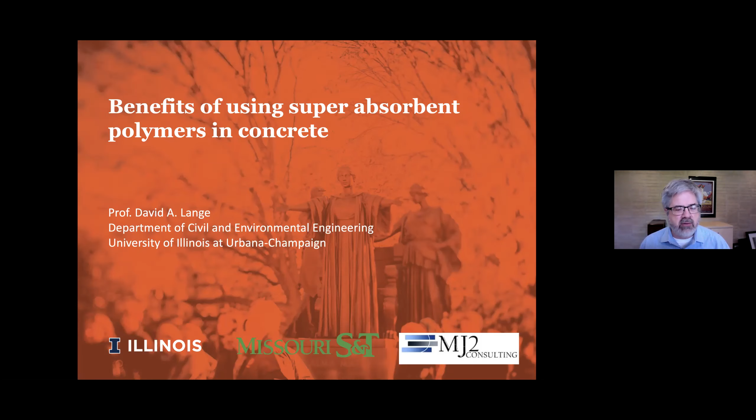As we get started, I want to make acknowledgements. First, introduce you all to the team on this research project: Kamal Khayat, my very good friend and colleague from Missouri University of Science and Technology, and Matt D'Ambrosia, who is also one of the PIs. Kamal, Matt, and I are the PIs of this project. Matt is working with his MJ2 consulting company.

And then I list some of the students and postdocs: Nima Farzania, Yunkun Gu, Kartik Padajay, Chuan Yu Shen, Rufi Zhou. Those are the students who have been primarily involved in the experimental work.

It would be a big mistake to overlook our big industrial supporters. I really appreciate the outreach of support from suppliers of SAP that have been involved: Martin Matsushek, Scott Erickson, Mike Hensley, Steve Schaaf. And then a special emphasis on our contributions from Ozinga.

Ozinga has helped us with field trials, last year and also coming up. Ryan Ciodella has been my most recent strong contact. And in doing so, you know who I left off? Theron. I didn't have your name on here, but you've been the contact that has drawn us close to Ozinga and helped us solve problems there. So Theron Tobolsky is one of our big supporters as well.

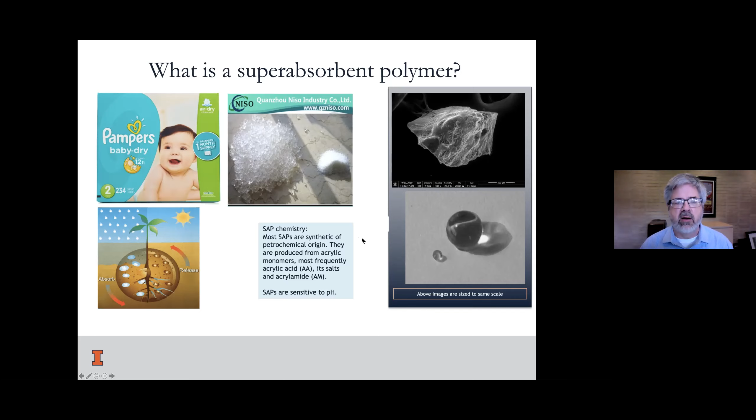On the right-hand side, you see two different kinds of particles. If the super absorbent polymer is basically created from a bulk material and crushed, we see particles that are very angular like this, and in fact this is how most of our products are - they have this crushed form - but you could also get them in a beaded form. We don't tend to see it that way in our product, in the materials for our work.

The idea with SAP is that we add this material as a powder into the concrete truck and use its ability to hold on to water and release it later. There's a competition for water, and the SAP particles win that competition when there's an abundance of free water, so they swell up in those first minutes of contact with the concrete.

As the concrete mixes and goes through a setting process, these little beads of swollen SAP stay in the microstructure until they lose the competition for water. That is, the hydration of the cement kicks in and starts fighting for water, pulling it away from the SAP when the time comes.

Hopefully we've got the structure of the concrete all set and established, and that water is seen as an extra reservoir to the paste as it goes through hydration. This helps us overcome a phenomenon we call internal drying, or autogenous shrinkage, which we'll talk about in a minute.

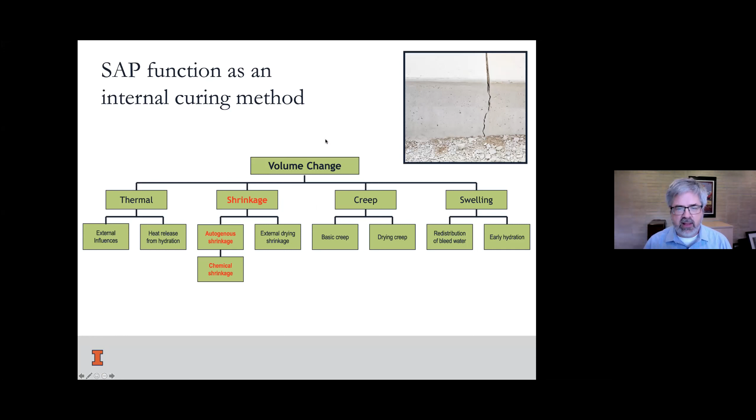When we batch concrete, we distribute the mass fraction of the main components: water, coarse aggregate, fine aggregate, and cement. This is very familiar to us—we encounter it every time we batch up concrete, and it's normally done by weights.

But we should take a moment to appreciate that the specific gravity, the density of these components, is not the same, so the volumes of these components will differ. Our coarse and fine aggregate have a certain specific gravity, water has a lower specific gravity, and cement has a high specific gravity, so the relative volume of the cement is down.

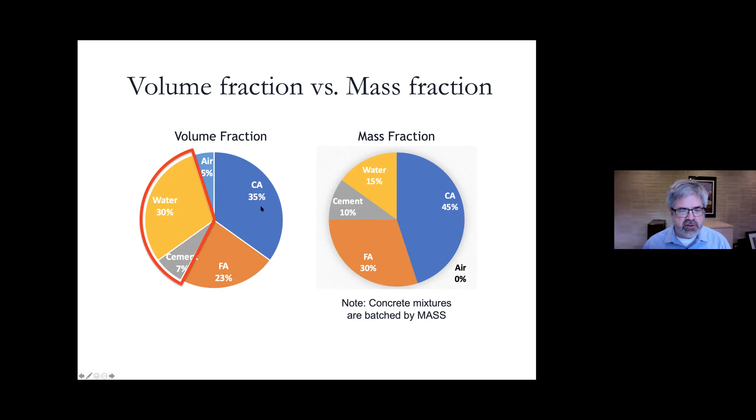This part, the water and cement, is what chemically reacts during hydration, and it's this part that creates hydration products that undergo autogenous shrinkage. We're not going to worry about any volume change from the aggregate, but we do worry about it on the cement paste side.

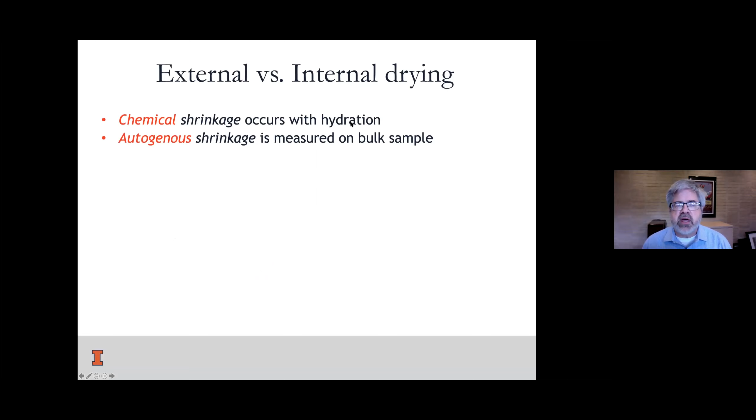This goes through a 6 to 7% reduction in volume of the hydration products compared to the original water-cement volumes. That reduction is called chemical shrinkage, and it's just part of the reality of our system.

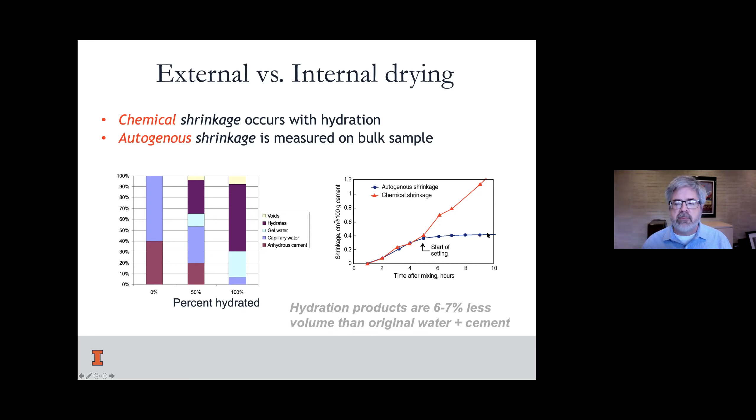They're basically the same thing when the concrete is fresh and fluid—if there's any reduction in volume, the material just collapses on itself, so here they're equal. But at the start of set, there's a departure. With set, the autogenous shrinkage starts constraining and creating stress in the microstructure, because the free collapse of the material, since it's no longer a fresh flowing material, can no longer occur. So we get this deviation between chemical shrinkage and autogenous shrinkage.

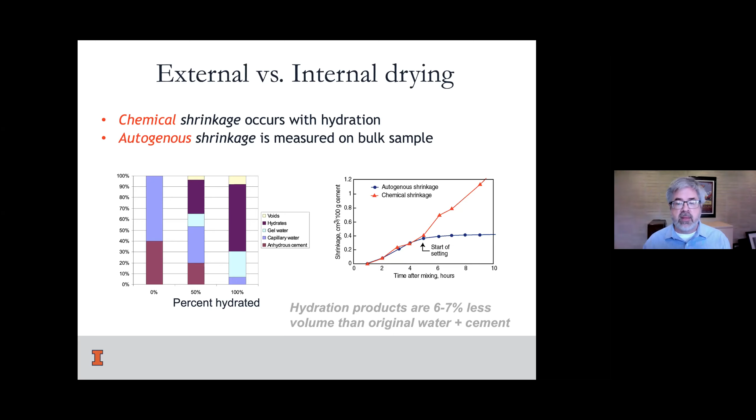When that deviation happens, that's the moment stress begins—this is when autogenous shrinkage starts creating an internal state of stress that causes cracking. That's why we need to address this internal problem.

And finally, I run out of free water and something has to give. What gives? Here come the little water vapor bubbles, we'll call them bubbles. They're not necessarily bubbles like a regular entrained air bubble. They are little zones of water vapor where the liquid water is no longer there, but there's a pocket of water vapor, a pocket that has negative pressure.

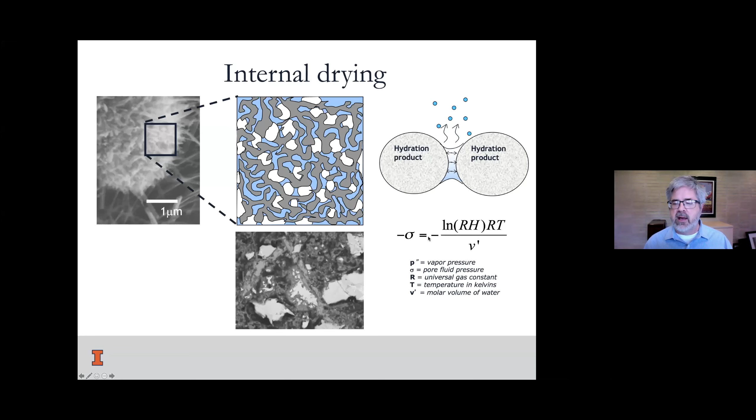So we want to try to stop that water loss if we can. How are we going to do it? Well, the basic idea is that we go through wet curing or conventional curing to keep water from leaving the external surface. But we also have this problem that would be true even if the material was perfectly sealed. This problem is not due to external drying shrinkage. And so we have this idea of internal drying.

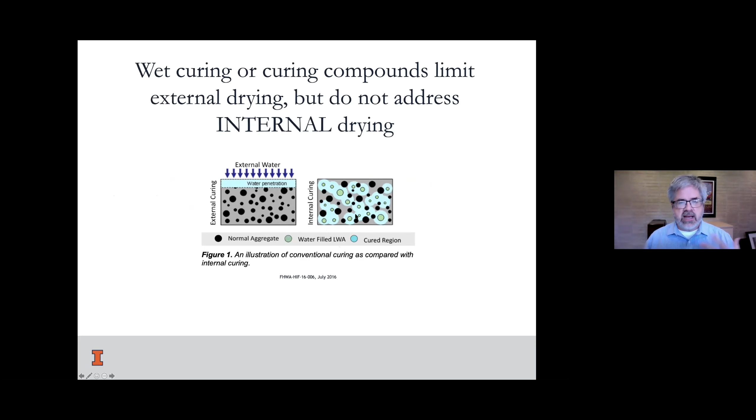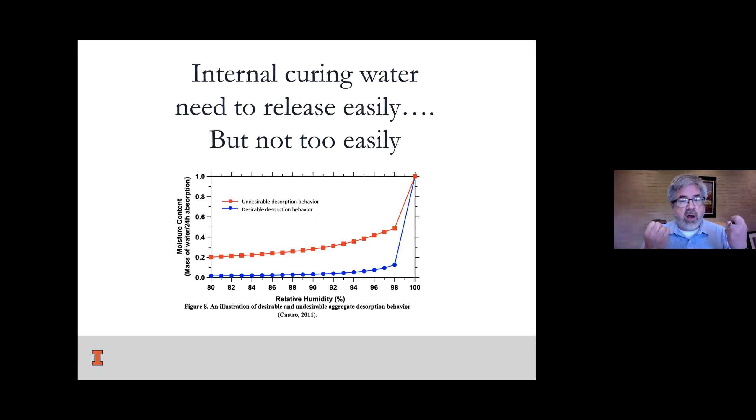With internal curing, we need to find ways to put that water in a pocket and then release the water easily, but not too easily. If it's too easy, then we haven't accomplished anything—the water is just free and moving around like it normally would. But we want to have some kind of retention ability, so the water is held until a little bit later in the process. You can see here where a couple percent drop of relative humidity creates a pull, a competition for the water that pulls it back away from the superabsorbent polymer.

Another common way to do internal curing is with lightweight aggregate. We've been comparing lightweight aggregate and superabsorbent polymers—the basic idea is the same. In the case of lightweight aggregate, we have a porous stone, maybe 70% pores, and the water sits in this saturated lightweight aggregate. Then when it is needed, it comes out fairly readily. It loses that battle pretty readily—the lightweight aggregate tends not to hold onto it very well, and it pulls away into the microstructure. It's been relatively established as an internal curing technique.

I think working with these lightweight aggregates is not something everybody likes—trying to source them and keep a stockpile. They're maybe a little bit hard to find in the marketplace. So there are reasons to think that lightweight aggregate is not necessarily a great solution for everybody.

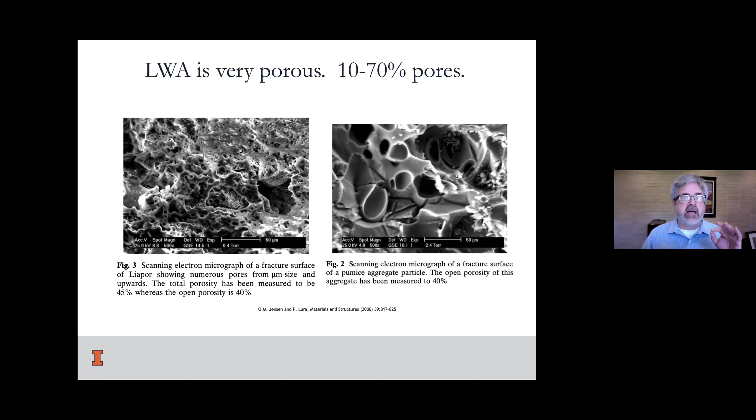So for superabsorbent polymers, here's a little description of how we measure the capacity of these things. We have an absorption behavior and a desorption behavior. If you wanted to test this, you might put a sample of the superabsorbent polymer in a tea bag, literally a tea bag like you make tea out of, with paper around it to keep it isolated. Then as water is absorbed, the weight of the bag of saturated particles becomes heavy. We measure that, and later we can see it desorb as there's some kind of demand for that water outside.

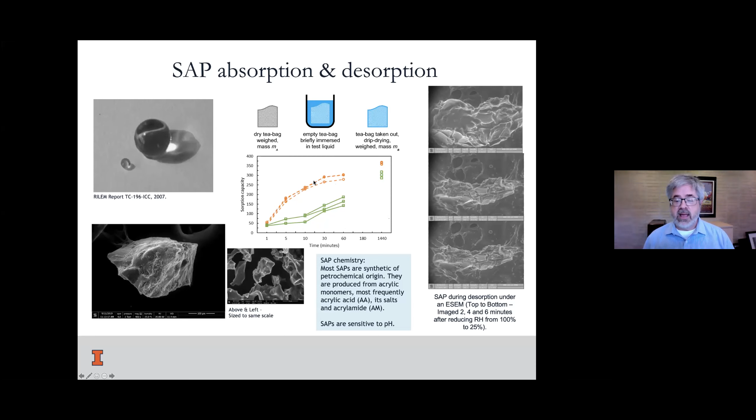So in this case, we just saw a couple different samples of brands of SAP, and the simple point is not all SAPs are the same. Some absorb more, some absorb it more quickly. We would not want to make the mistake of saying they're all the same.

Here's another point to keep in mind: distilled water versus pore solution. Pore solution is not clear, plain distilled water—we know it has a high pH.

That's why in concrete work we have a lot of safety measures to keep it from long contact with hands. You've probably experienced this yourself, where you have concrete on your hands and it feels like you really need to put some lotion on at the end of that.

So in the case of distilled water, just look at these numbers: peak absorption in grams per gram. These are the numbers when you have plain distilled water with these 5 different SAPs, 100 times gram per gram of the SAP. Wow, that's a lot of absorption, right?

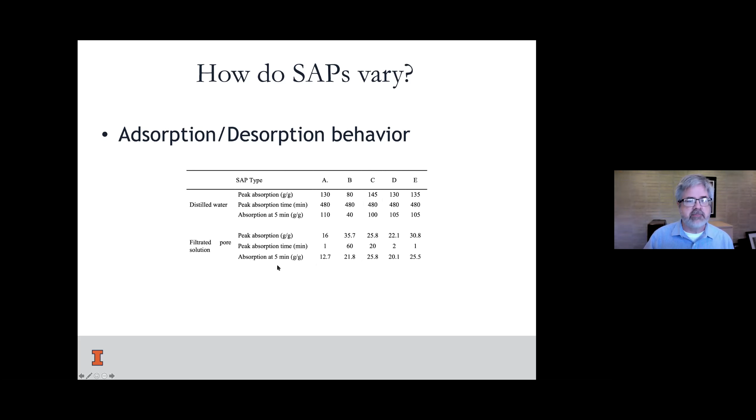A big question for new users is how much lightweight aggregate or SAP should be added to concrete to do the job. So the first thing we need to recognize is, what is our objective?

We need to add internal water enough to offset chemical shrinkage. That's what we're going to try to do. We talked about what that chemical shrinkage is - we know it's 6 or 7% by volume of the cement. And that comes, in this case, I'm summarizing it as 7 pounds of water per 100 pounds of cement as a rule of thumb.

In the case of lightweight aggregate, you want to make sure that you're using saturated lightweight aggregate. If it's dry, it's not helping you too much - it won't work the problem as effectively as bringing it in as a saturated particle.

In the case of SAP, however, we really don't want to bring that water in with the SAP already saturated - this would be a globby mess, to be quite frank. So what we want to do is add it as a powder right when we're working with a mixing operation.

So we can add it in - we've added it into the back of the truck. It actually goes in pretty well. Our testing shows it's quite homogeneously dispersed.

So you always wondered about that - would this work to be dispersed in a truck if we did it that way right at the time of delivery of the concrete to the site? Our sense is that that's probably the best way to go, to add it as an admixture into the truck right before using.

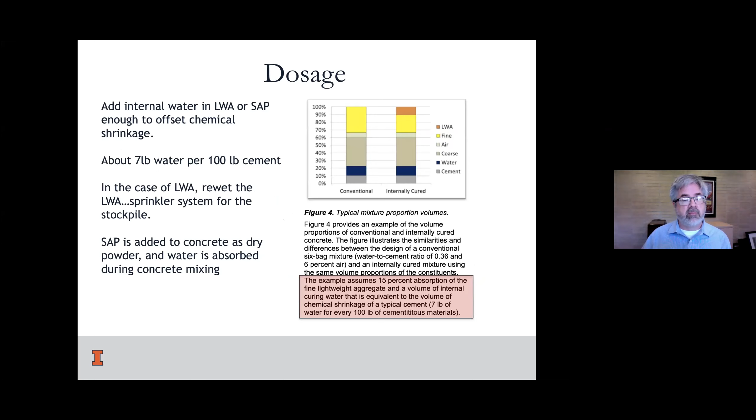So if we're doing these dosage calculations, this would be similar for SAP or lightweight aggregate. We want to know the absorption and desorption characteristics of our material, and basically size the dose of the lightweight aggregate or superabsorbent polymer to give us delivery of that water.

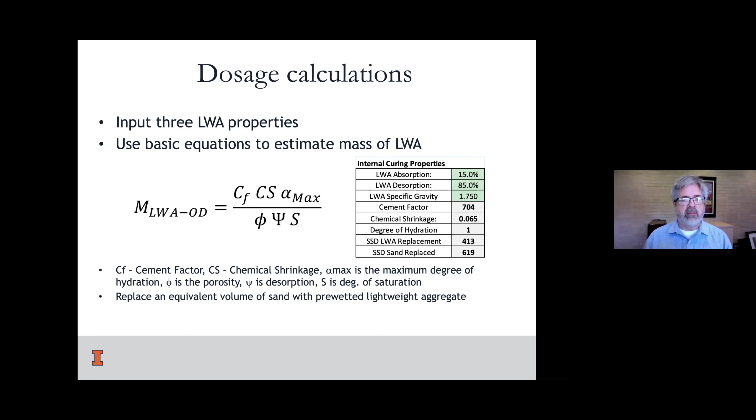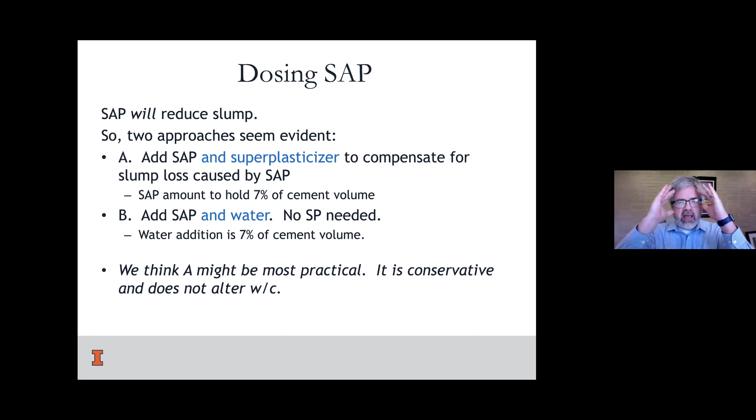Dosing SAP - we know that SAP will reduce the slump. So we somewhat have two choices to make here. We could add the SAP, suffer the slump loss, but then add in a superplasticizer to compensate. That would allow us to use the original mix design and count on the superplasticizer to offset that workability factor.

Secondly, option B, we could add some extra water. Therefore, we would want to have a mix design that understood that. Because with this mix design, we're going to change the water-cement ratio if we do that, we would maybe avoid the use of the superplasticizer, et cetera.

You know what? We early on all came to think that let's just do A. A is sort of the more reasonable approach - we don't want to perturb the original mix design if we can help it. We'd like our strengths to come out as predicted by the mix design originally. We also would like to think of an easy approach to do this in practice, since we have a lot of history with certain mix designs - we've used these mix designs.

We know they deliver certain kind of properties, everything. It would be nice not to change all that. It would be nice to have the strengths come out the same, and the durability would be maintained, and so on and so forth. And that's why A seems to be what we're leaning toward in terms of this.

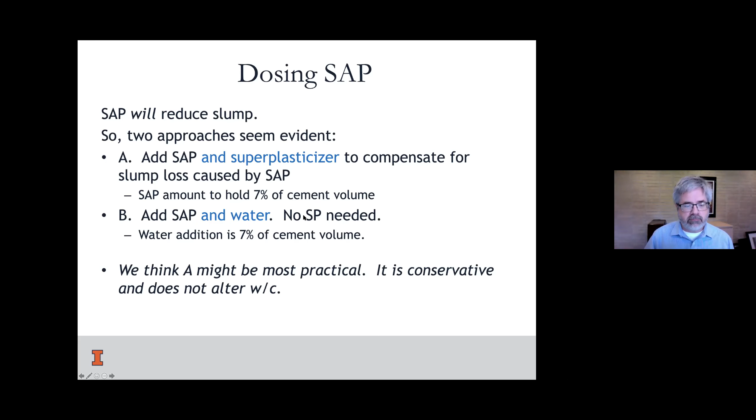If we are able to add it, such as we saw with method A, our water cement ratio is not going to be changed. We would hope that perhaps the strengths are going to be the same. Good news, in fact, all the testing seems to say that's true.

We basically have sets of different kinds of materials that we've tested, and the strengths are either the same or even maybe a little bit improved because of this more effective internal curing and the distribution. I guess I would say there's some argument about having a more homogeneous microstructure.

But at any rate, there's not a reason to think that somehow the use of this SAP is going to create a spiral of problems with strength and so forth. We think that it'll be conservative, and that your experience with strength should be just fine.

But if you want to target a strength, I think we go back to cement mix design basics. We design for the strength based on a water content in the mix, the water cement ratio, and so on.

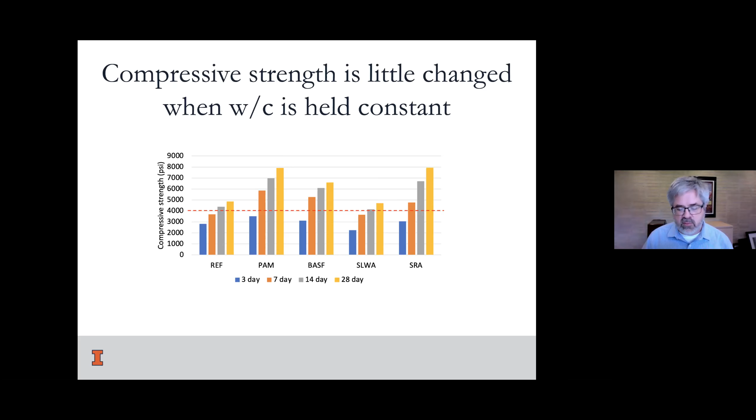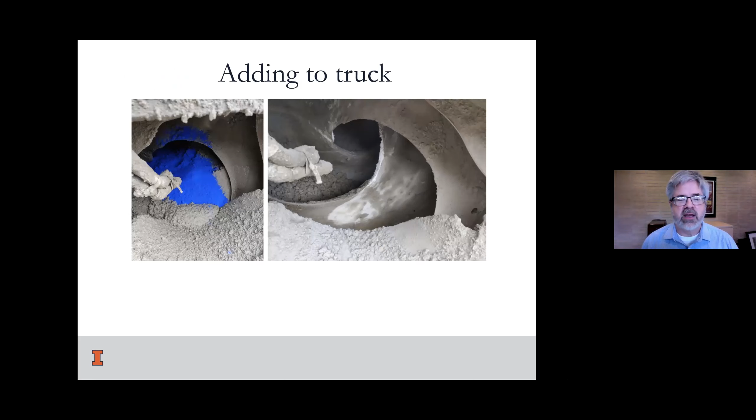And so we've added it in there into the back of a truck, and in fact, it just blended. One thing we notice is that it sometimes might get a little bit agglomerated on the surface of the blades, but I think there may be even some ways to be clever about entering it so that it doesn't even have that much problem with the blades.

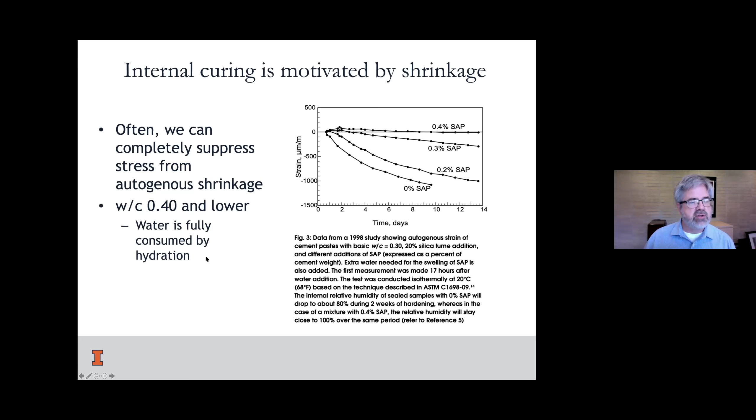But as we use SAP, we can offset that because the system works to avoid this idea of desiccating the microstructure.

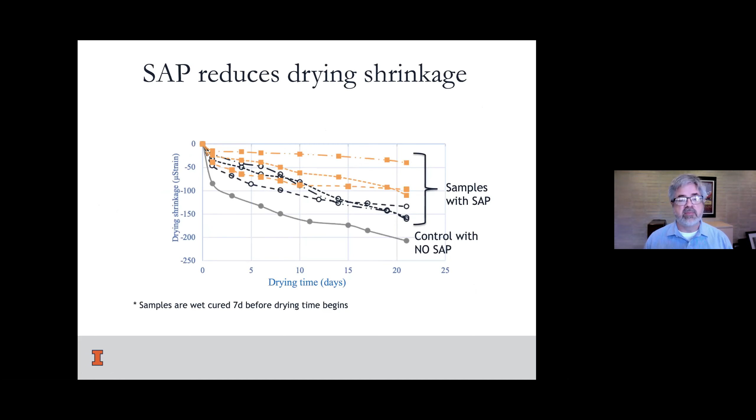We also have done some work with the restrained ring test. Actually, a lot of this work is still underway. This is a somewhat recent test where we cast concrete around a steel ring and then we put strain gauges on the inside of the steel. If you've not seen this test before,

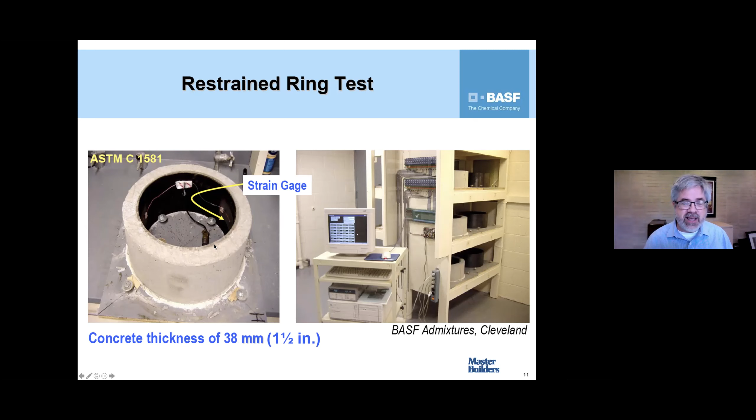the first instinct is to be skeptical. You mean the concrete shrinking around the ring is going to be actually measurable on a big, thick piece of steel like that? The answer is yes. These strain gauges are real sensitive and they can pick up that squeezing action that the drying concrete places on the steel. It's amazing.

And what that does then is it gives us a chance to measure that stress, and we can track that stress with time. In this case, we get to about 6 days, and we keep building stress more and more and more, and then boom, something happens. What happens is called a crack. The sample, the ring of concrete breaks, all that stress is relieved, and we see it in the data.

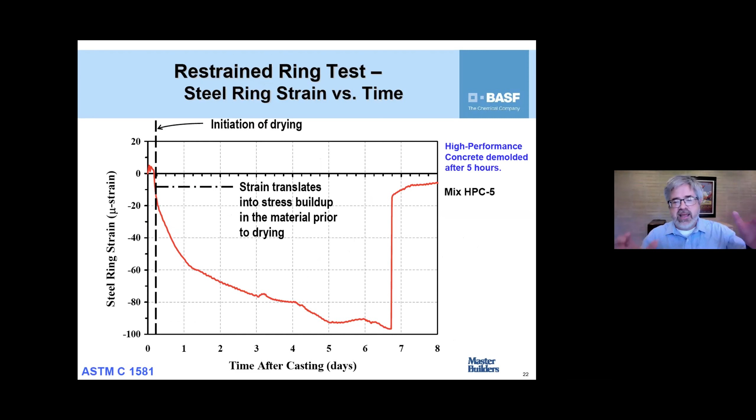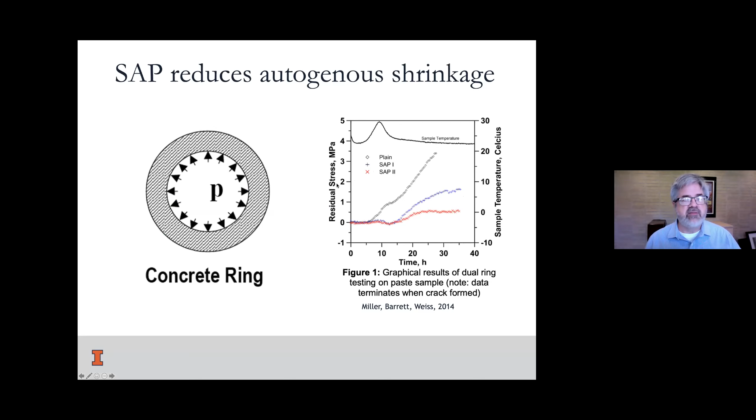So here's some examples with SAP. We have a plain sample and then 2 different SAPs. Here's the stress is building, building, building, and where the data ends is where it cracks. Okay, so it cracks here at about 24 hours. And these SAPs did crack too, but more at 35 hours and much lower stresses when that took place. So those are nice, vivid examples that SAP is making a difference.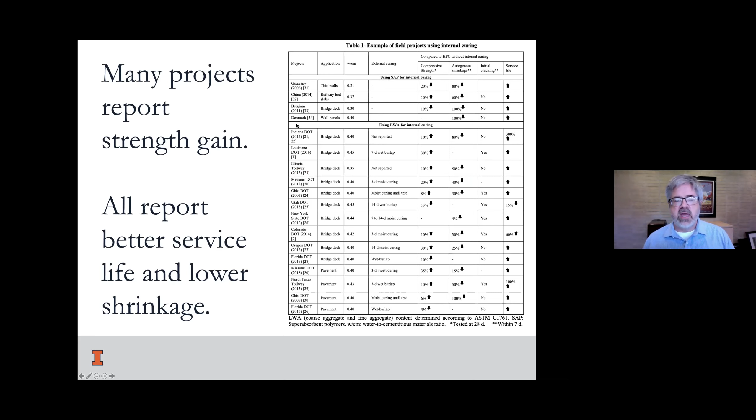SAP improves freeze thaw performance. Some people speculate, aren't those little particles of SAP leaving voids inside the microstructure? Yes, they are. Well, the concept of air entrainment is to have a little void, a pressure relief valve and so forth.

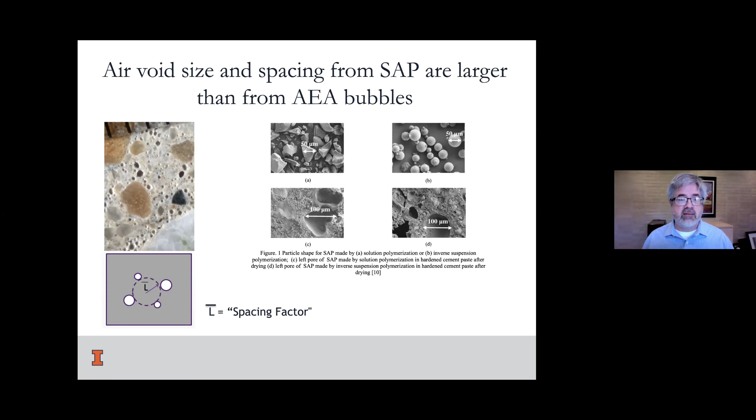Does that maybe remove the need for air entraining admixture? No, that's the finding. The basic thing is the air void size from air entraining admixture versus SAP is much larger with SAP. These are just illustrative pictures, and I don't have data to give exact sizes, but take it as a truism that the voids from SAP are big, with big spacing, and therefore have limited ability to reduce freeze thaw stresses and degradation.

So the data here shows our samples: some with no air entraining admixture, and the same materials with air entraining admixture. The SAPs outperformed the reference with air entraining admixtures. All of them were okay, all stayed above the threshold in the 666 tests. But when you don't have air entrainment, they all failed at some point before 300 cycles.

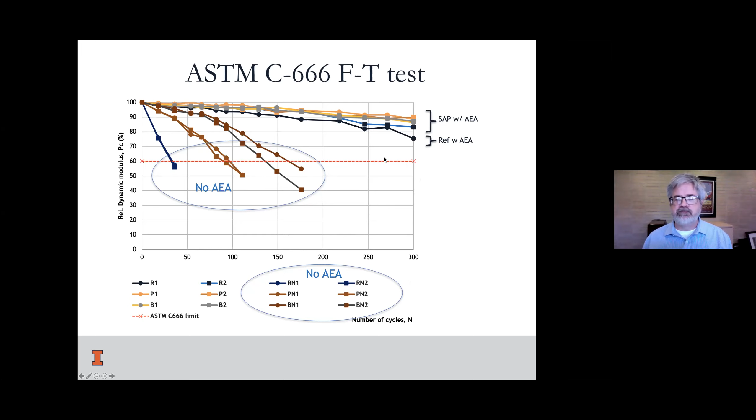So the SAP is better than not having SAP, as you see here, but it's not good enough to say, oh, I'm just going to leave air entraining admixture out and assume the SAP is going to work for me for freeze thaw. No, don't do that. But anyway, it's working in your favor, so that's a good thing.

Other ways to control shrinkage. Before we leave this topic, we want to give a nod to other things that are done to control shrinkage.

Shrinkage reducing admixtures, these are just broad observations. I think SRA admixtures are the real deal. They're finding pretty good traction in the marketplace, and people are finding them to be very useful. They're a fairly new generation of admixtures. That's pretty exciting.

Second, we could avoid all this self-desiccation, this chemical shrinkage problem, if we weren't so low. Part of our problem is self-imposed. We're always driving concrete strengths to be so high, with very low water cement ratios. So it's basically a problem we beg for. We're creating concrete known to have this demand for water that we're not providing in the mix design. We shortchange the mix with regard to water, and hence this whole subject.

So you could look for opportunities not to be as aggressive. This is one of my themes, and another theme I hit on a lot is that people trying to make concrete set and harden so fast don't realize all the downside to doing that, and the penalties we pay when we overdo it.

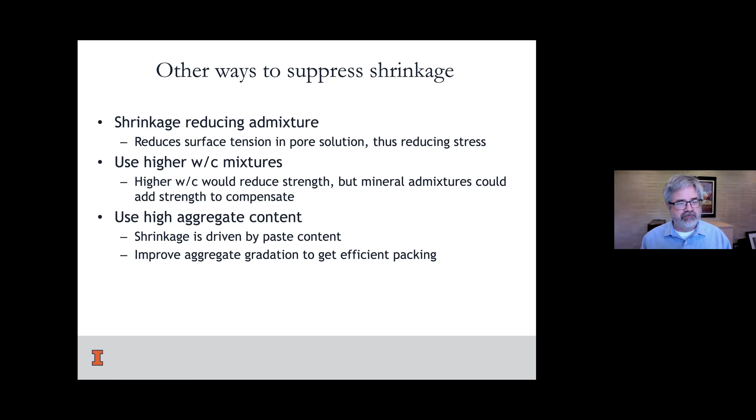Okay, so that brings me to concluding remarks. Our project has several months to go. We're excited to continue to work with the tollway. We hope to help develop guidance that will show up in tollway documents and specs and so forth.

Broadly speaking, I am a pretty big optimist that internal curing is going to find a lasting place in our industry, that it has real payoff and real value that you can choose to take advantage of. I think one advantage I always express to people in industry is that as you stay on top of these next steps of technology, you're creating opportunity for your company to have higher quality, better performance, and perhaps a competitive advantage over your competitors who don't pay attention to these new advances. And that's why you want to be involved in ACI. ACI is a community of people who are all about improving concrete quality, and it's a good neighborhood to be in. Be part of it - it hopefully comes right down to your bottom line.

Thank you again for your attention. I guess I've completed the presentation and am ready for questions.